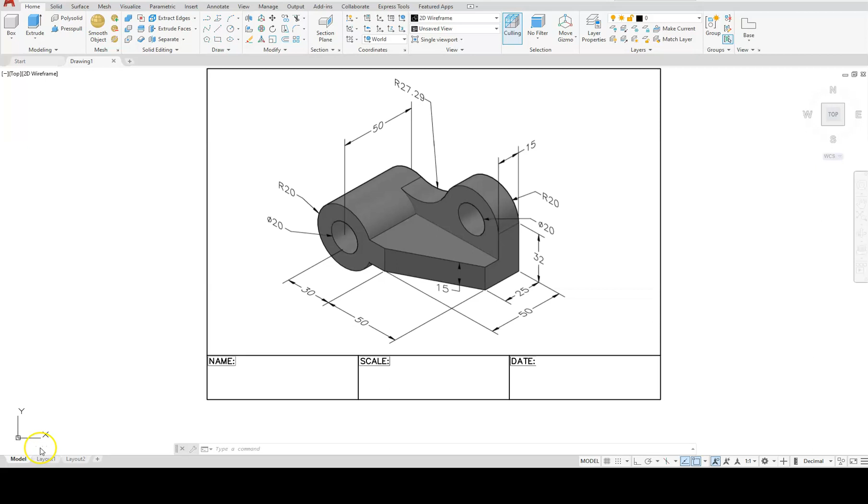Okay, in this example, we're going to see another extrusion, but this one has kind of two extrusions that I'm going to combine into one. So the first thing I'm going to do is make sure I have the correct O-snaps turned on.

Once again, you can pause the video, and these are the most common ones I'm going to have turned on. Also, you should see my ribbon is different because in the last video I came from a 2D drawing to the 3D. You still have the same 2D commands listed here under the Draw and Modify section, but I'm going to key them in just to make things a little bit easier.

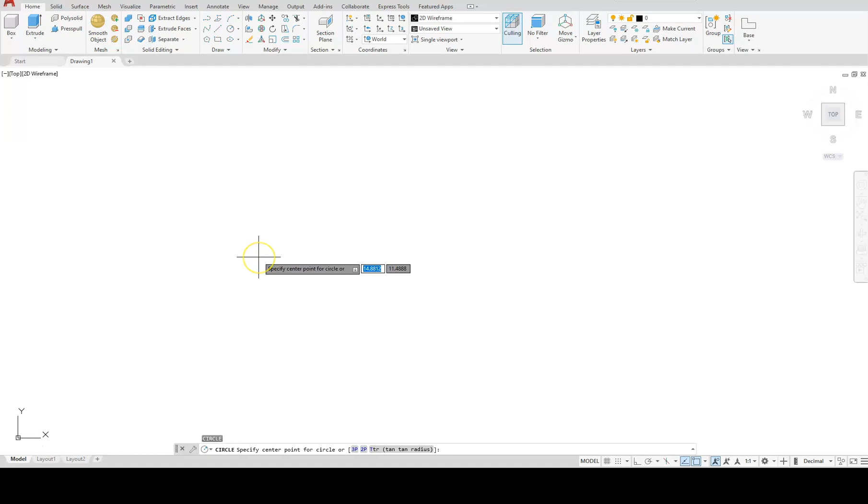Okay, so starting with a circle that has a radius of 20, remember the shortcut is C, enter. Select your location and where you want your circle to be, so I'm just going to click here. And then type in 20 for your radius, so 20 followed by the enter button.

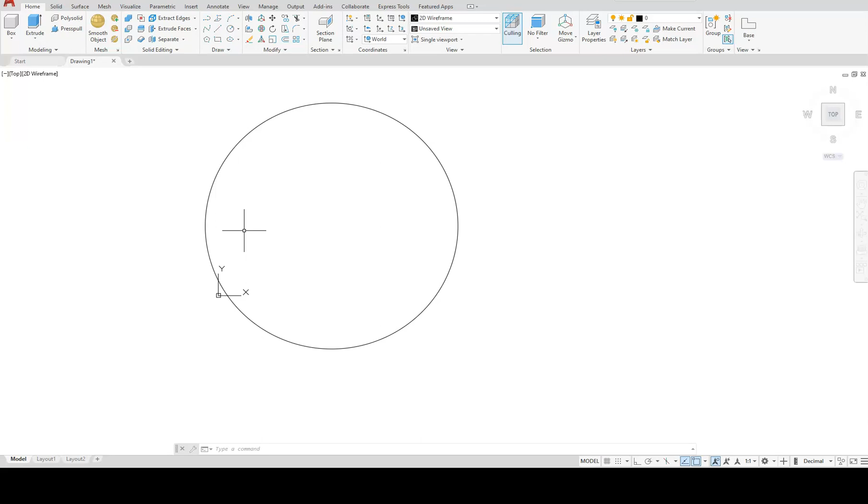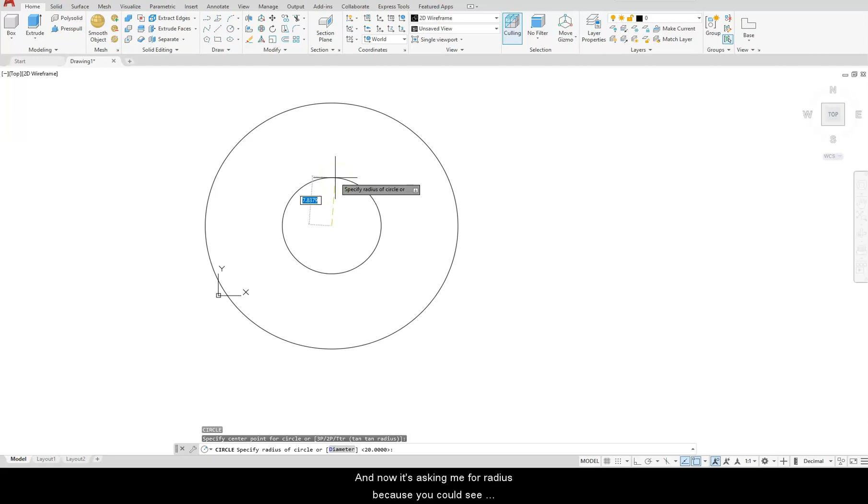Okay, now I have a diameter that I want to put on the inside of that, and the diameter is 20. So I'm going to type C, enter. I'm going to place the center of my circle in the center of my previous circle, so I'm just going to touch the edge and come down to where that plus is, left click, and now it's asking me for a radius because you can see that right by my cursor. I'm just going to go down to the command line and select diameter, and I'll type in 20.

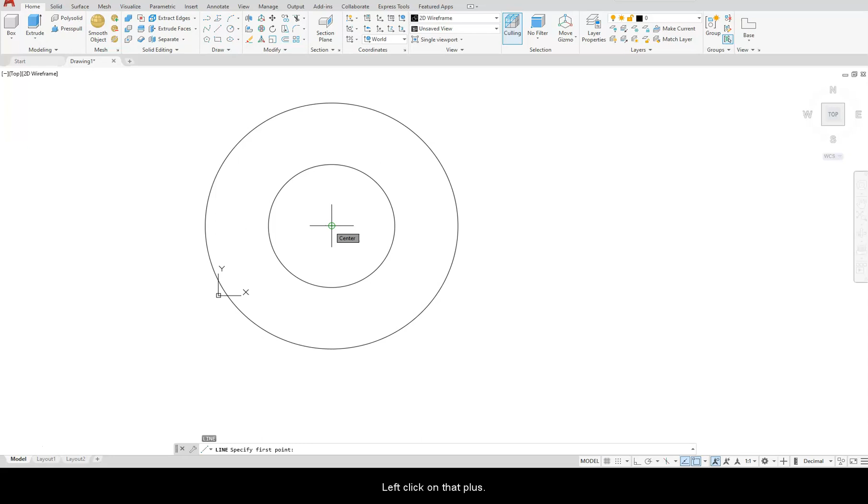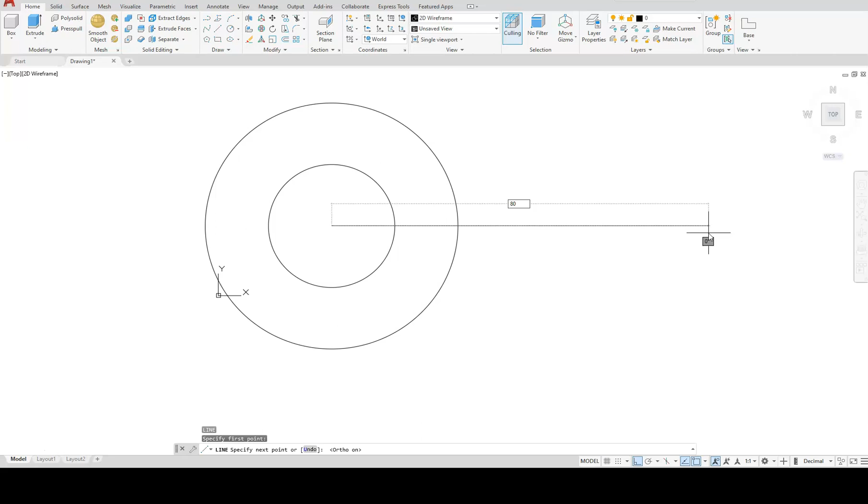Okay, the next thing I'm going to do is draw a line. So L, enter. I'm going to go to the center of here, and remember, if that center is not showing up, touch the edge of one of your circles, left click on that plus. You want to make sure you got a line going straight out this direction, so I'm going to hit the function key 8, F8, to turn my ortho on. Remember that the icon down here should turn blue. I'm going to aim it here to the right, and I'm going to type in 80, enter. I'll hit the escape button after I do that.

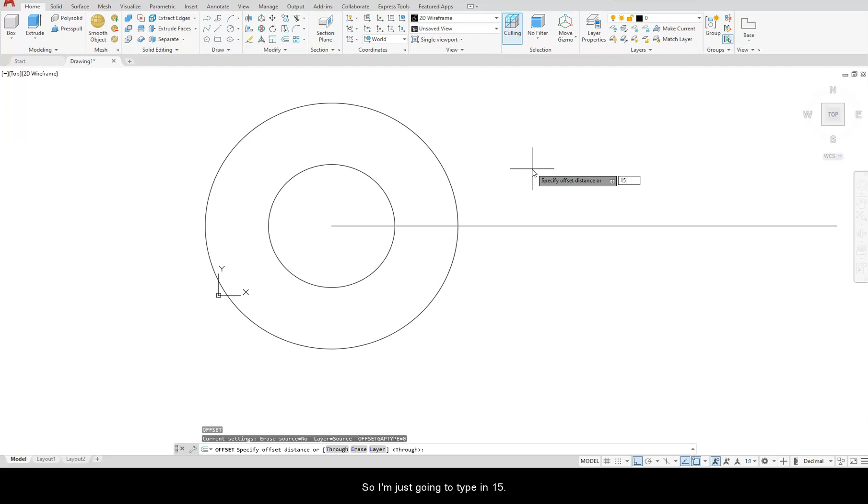Next, I'm going to use the offset command, and remember the shortcut for offset is O, enter. I need to give it a distance because that's always the first thing offset asks for. You can see by the drawing that the thickness of this is going to be 15, but I need to cut that number in half. So I'm just going to type in 15 divided by 2, enter.

Now I'm going to select the object I want to offset, so I'm going to select this line, and then I'll click above it - one left click here. I'm going to come back down and click that exact same line, and then I'll click below it, followed by the escape button.

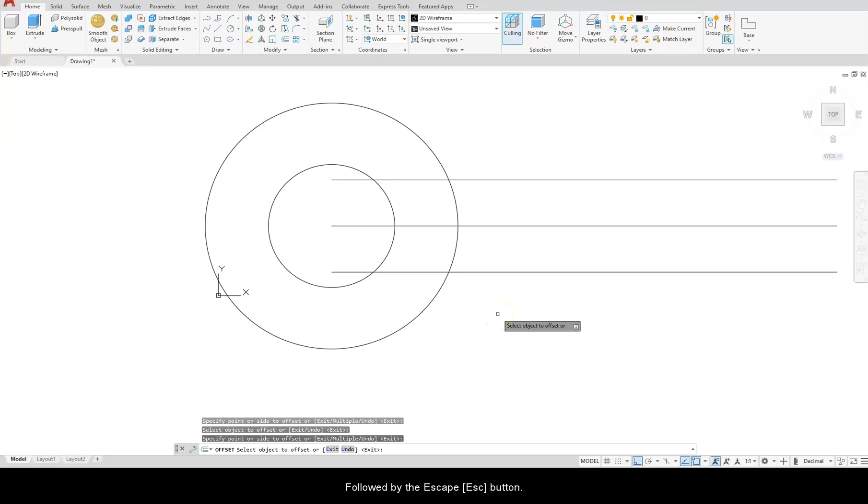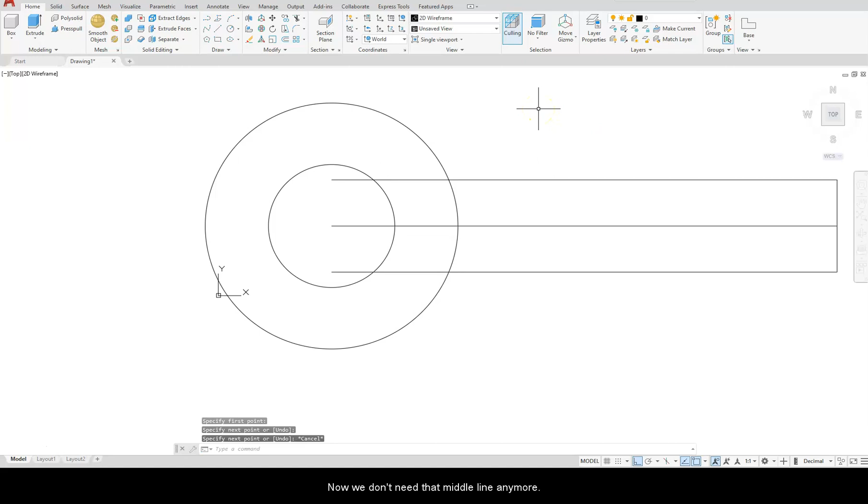Now I'm just going to create a line and connect those endpoints. So L, enter. Select this endpoint, and then go up and select this endpoint. Hit the escape button. Okay, now we don't need that middle line anymore, so I'm just going to go ahead and erase it - select it and hit the delete button on your keyboard.

Next thing I'm going to do is trim these lines that are extending into here. So the shortcut for trim is TR, enter. This is something new - if you're using the 2021 version, it bypasses the cutting edges for you, so I can just immediately start trimming by clicking here, and here, here, and here, and then I'll trim in between here. Now, if you have any version before this one, you're going to have to hit the enter button right after you type in TR, enter, and then followed by another enter. That'll get you to trim just like I did.

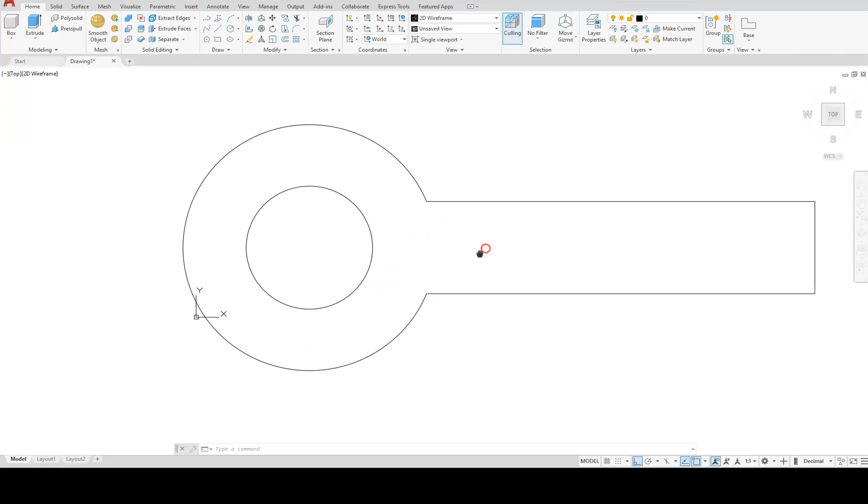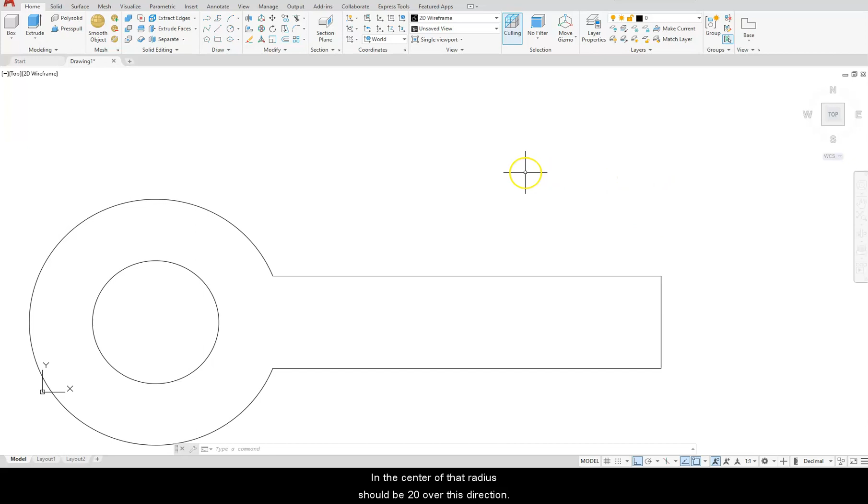Okay, so I'm just going to move this down a little bit. Next, I'm going to go ahead and create my shape that is located here. But first, I need to locate that circle that has a radius of 20. You can see that it's located from this line going up a distance of 32, and the center of that radius should be 20 over this direction. So I'm going to create a circle - C, enter.

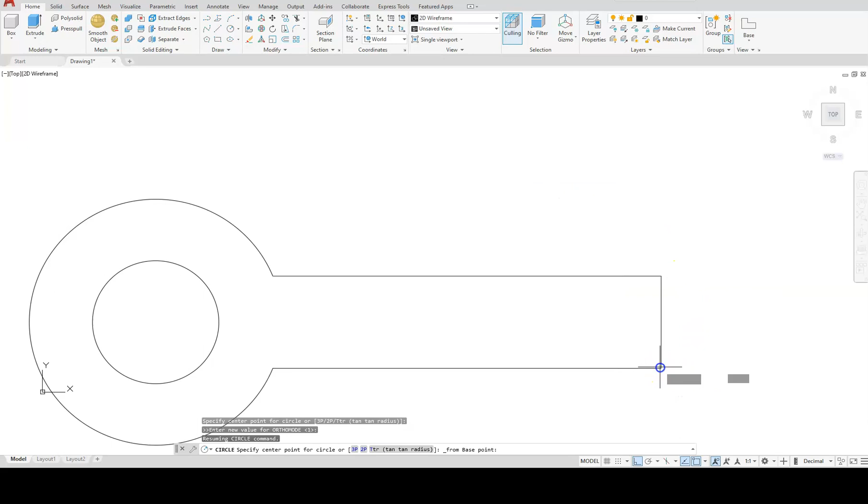Hold down the shift button and do a right click. I want you to select from, click on this endpoint. You're going to have to type in the @ symbol, -20, comma, 32. Enter. And now you're going to see the location of that circle should be in the right point.

I just need to give it the radius. So I'm going to type in 20, enter.

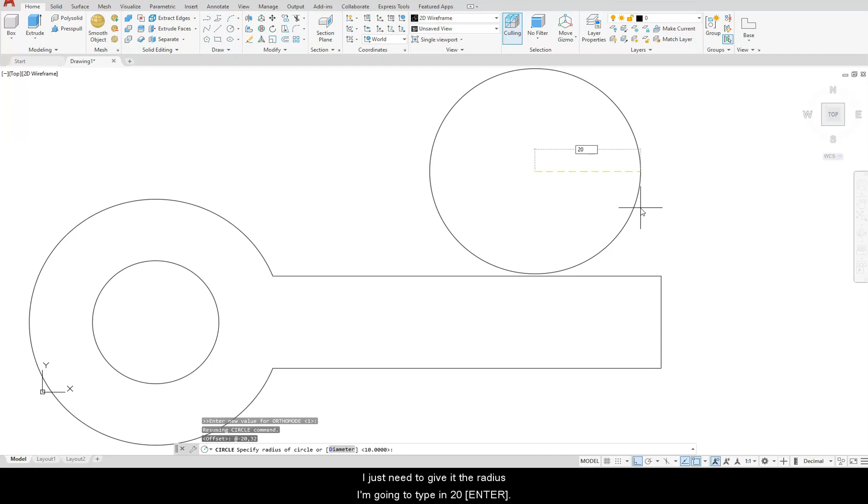I'm going to create a circle that has a diameter of 20 right on the inside of this one. So C, enter. Touch the edge of my circle. Come back and click on this center.

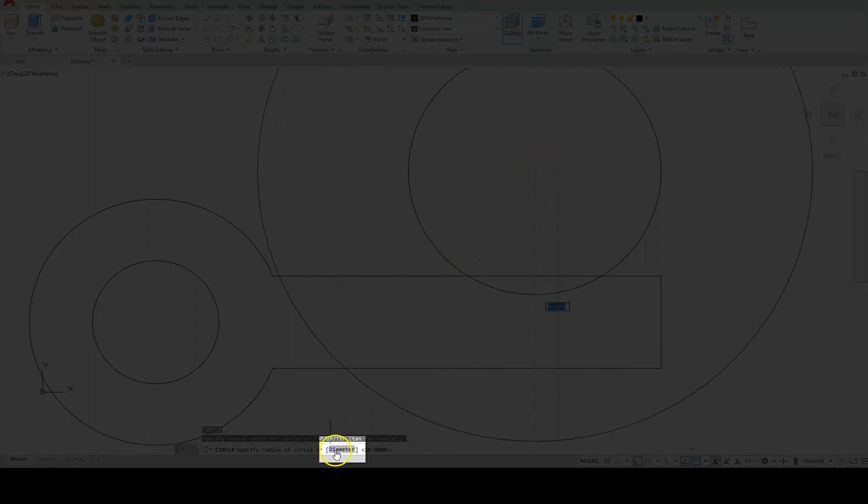Go down on your command line. Select diameter. Type in 20, followed by the enter button.

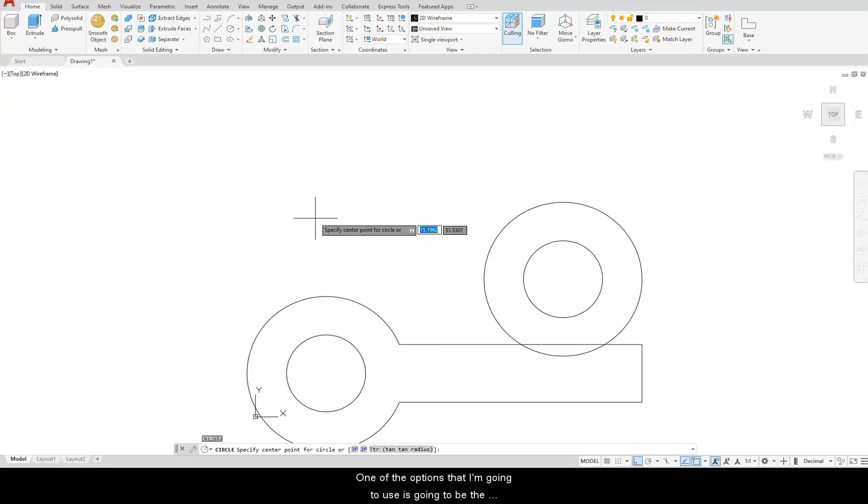Okay, now I need to go ahead and put the circle that has a radius here. So I'm going to go C, enter. And one of the options that I'm going to use is going to be the tangent radius option. So down on my command line, I'm going to select the one that says TTR tan tan radius.

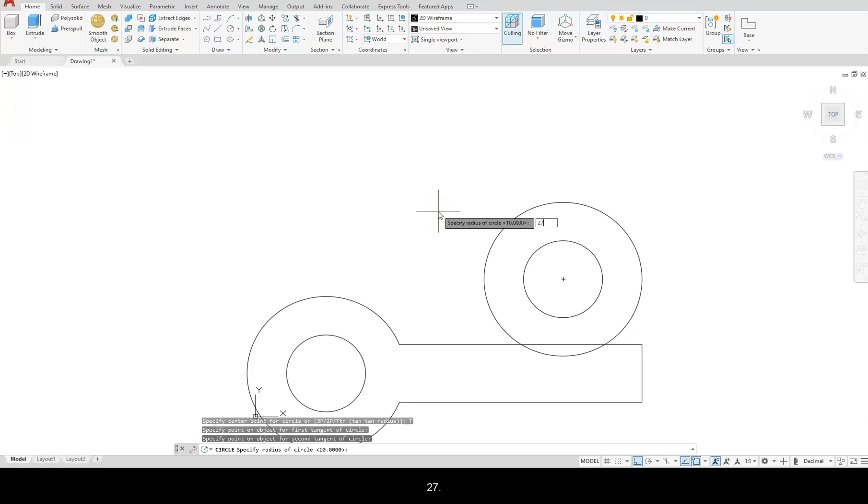I'm going to select on this circle, so click here. And then I'm going to select on this circle, so click here. And then I need to give it the radius, which is 27.29. Enter.

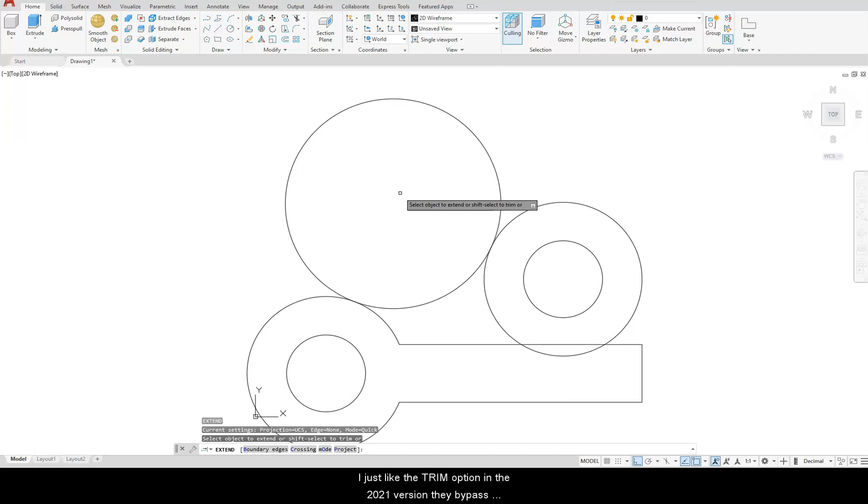I'm going to use the extend button this time, or the extend command. So EX, enter. Just like the trim option in the 2021 version, they bypassed the boundary edge. So I'm just going to select this line here. Make sure that you click along the top edge of this line to get it to extend up to that circle.

Followed by the escape button. I'll go back and trim. So TR, enter.

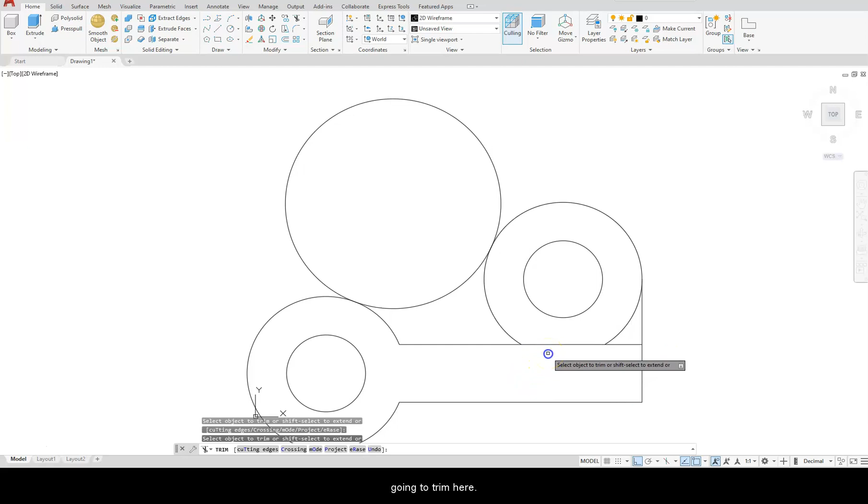Now I'm going to start trimming off these circles. So I'm going to trim here. And then here. Followed by here. And then on my circle on this big one on the outside, I'm just going to select here. Followed by the escape button.

Now I have everything that I need to complete my 3D shape, except I need to create them with polylines. Remember that one of the rules of creating solids is that these lines have to be polylines. I'm going to turn these into one rather quickly with the boundary command. The shortcut for boundary is BO, enter.

It's going to ask you to pick points, so I'm going to select this icon here. And then I'm just going to pick right on the inside of here. I'll hit the enter button. And you can see on my command line it says 2 polylines were created. It actually created a polyline on my outside and it created another one around my circle.

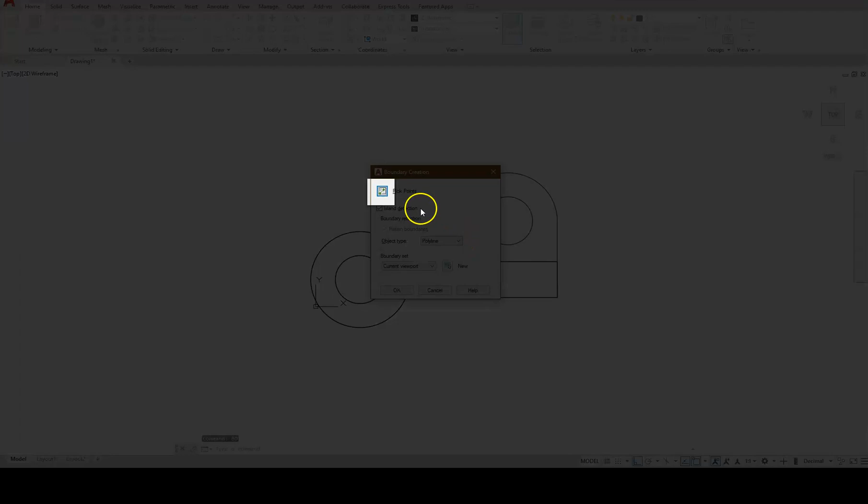I'm going to do that command again for the inside of this one. So BO, enter. Pick points. Select right in the inside of this one. Hit the enter button. And now you should have that same thing on the bottom on your command line that said it created 2 polylines.

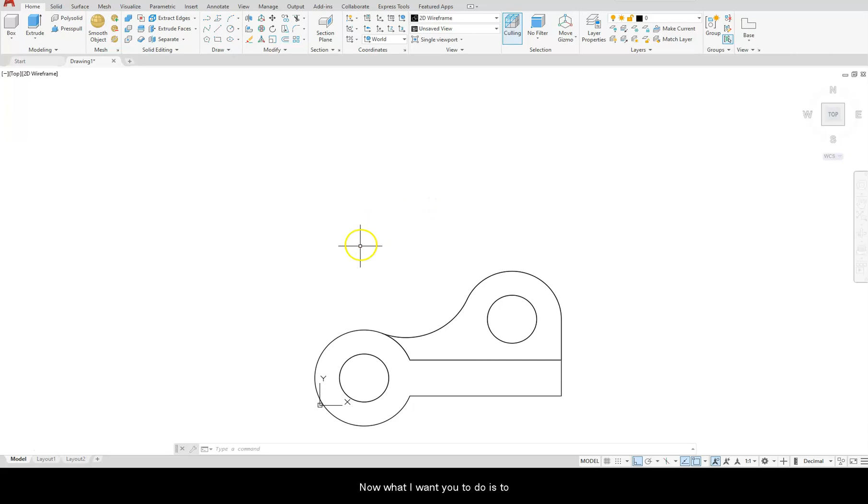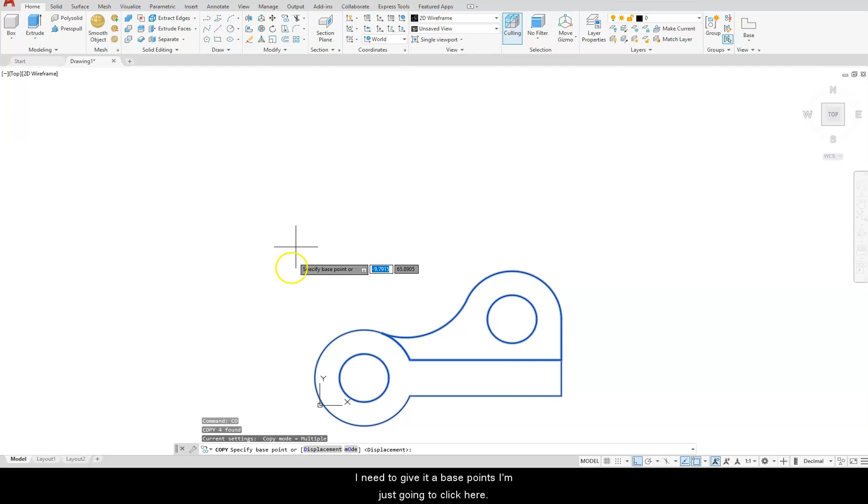Just going to pan down a little bit. Now what I want you to do is select this object here, this object, this circle, and this circle. And I want to copy these up. So with them selected, I'm just going to type CO, and that's the shortcut for copy, enter. Now I need to give it a base point, so I'm just going to click here and come up and click, followed by the escape button.

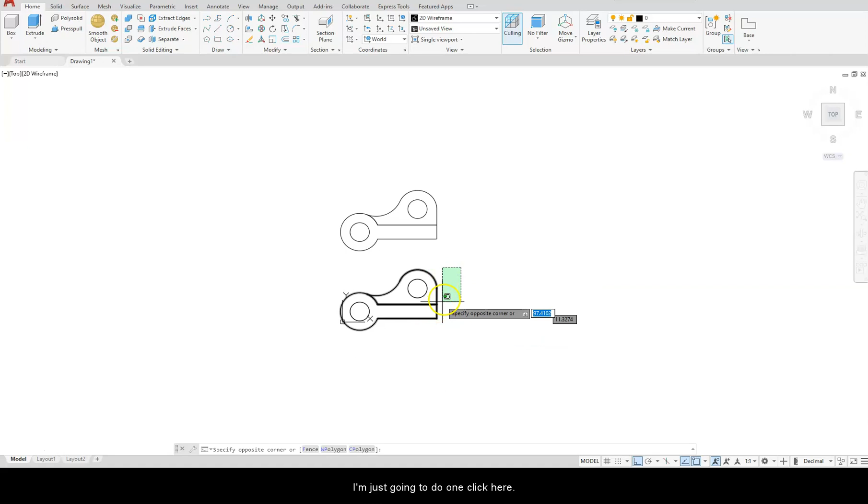Next thing I'm going to do is zoom out a little bit. And these shapes here at the bottom, I'm going to go ahead and erase. So I'm just going to do one click here and go across, and one click here and hit the delete button.

Okay, I'm going to put this in a 3D isometric view. So I'm going to select this lower left corner of my view cube.

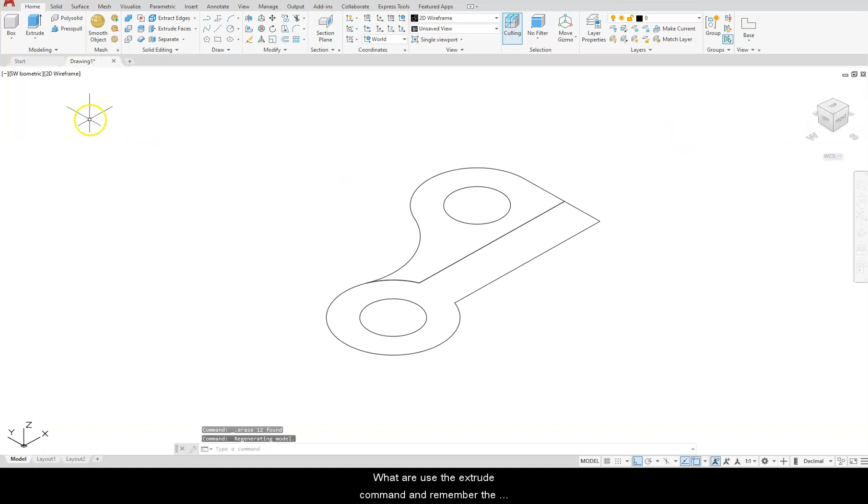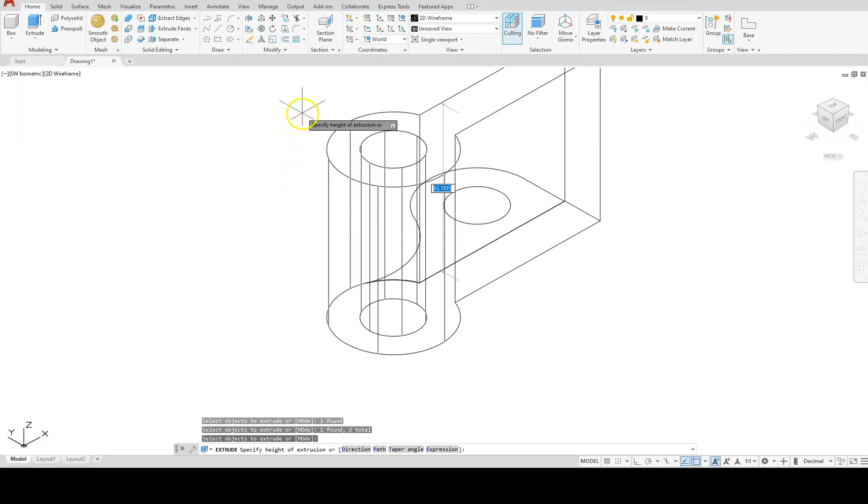I'm going to use the extrude command, and remember the shortcut for it is EXT, followed by the enter, or you can select this icon. And I'm going to select this object here and this circle, hit the enter button. I'm going to come up in the upward direction and I'm going to type in 50, enter.

I'll go back to the extrude command, and I'm going to select this object here and here, followed by the enter button. I'm going to aim in the up direction, and I'm going to type in 15, enter.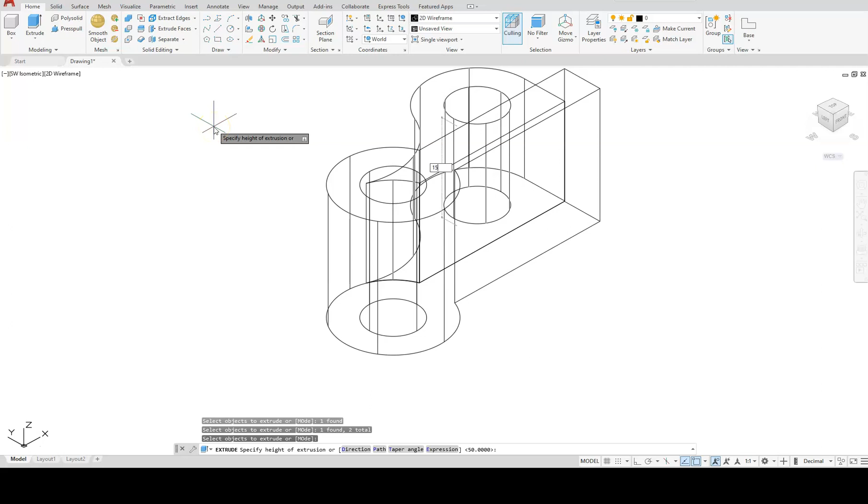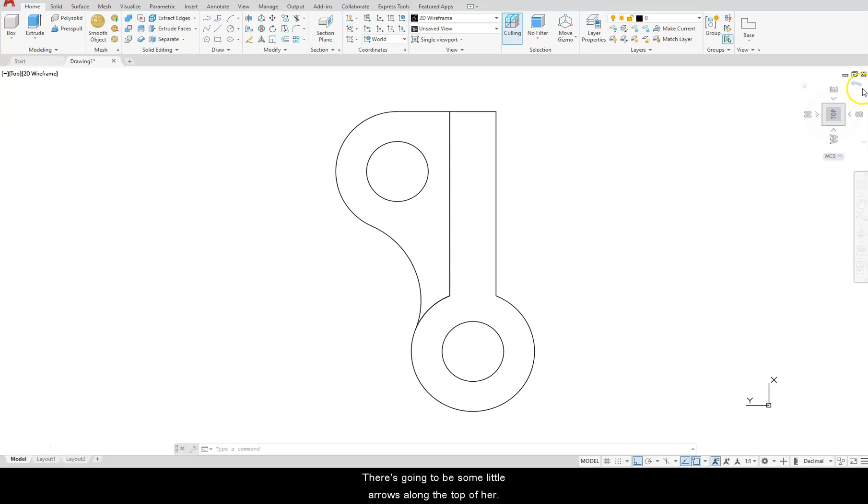Next, I'm going to click on this view cube where it says top. And you can see that if yours rotated correctly, but if yours is rotated on this kind of angle, if you come over to your view cube, there's going to be some little arrows along the top up here. So I'm just going to select this arrow here just to rotate my view to where it looks like that.

Underneath where it says 2D wireframe here, underneath my visual style options or controls, I want you to select here, and then select the one that says shades of gray. Now what I'm going to do, oh, I'm sorry, I meant to select shades of gray. Come down one more, shades of gray.

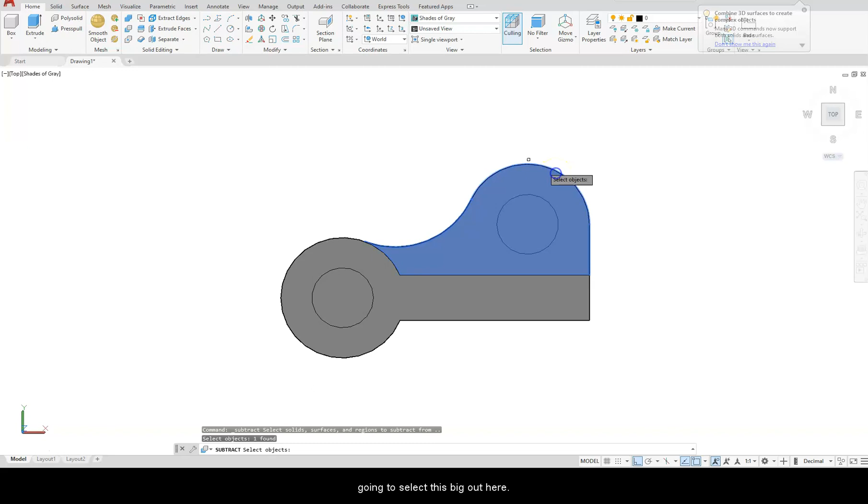The next thing I need to do is go ahead and subtract out these circles out of my objects. So I will use the subtract command. So I'll select it here. And with the subtract command, you want to select the object you want to keep first. So I'm going to select this big object here, followed by enter. And then I need to enclose this object here in the middle. So you can see that it is highlighted.

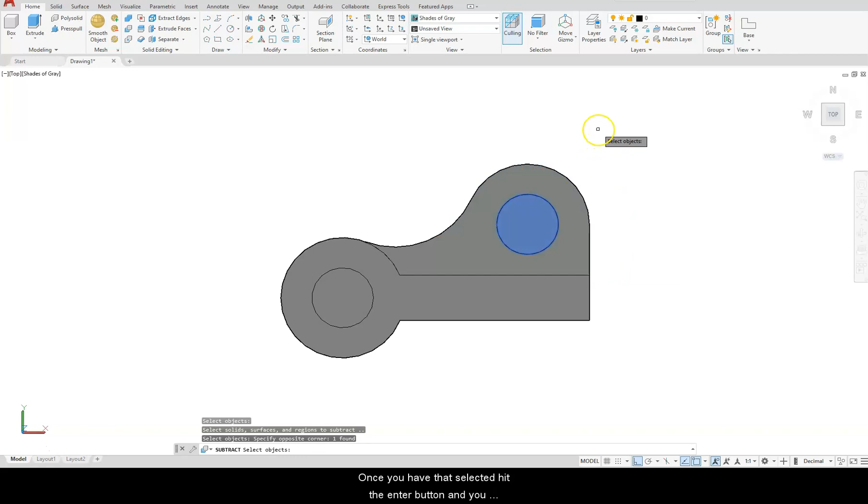If you are having trouble selecting that, another option that you can do is one simple click to the outside here and one left click here. Once you have that selected, hit the enter button and you will indeed see that that will subtract from your solid.

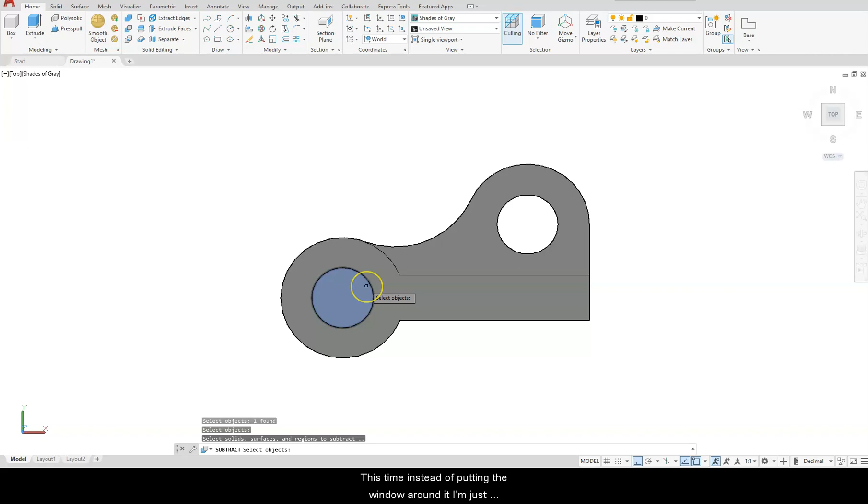I'm going to do that again. Go to the subtract. Select the object I want to keep, followed by enter. And this time, instead of putting a window around it, I'm just going to select it here. So once you have that selected, hit the enter button.

Next, I want to take a look and see how this object looks along this side. So I'm going to select this lower right of my view cube. And you can see that these are two separate solids.

The next command I'm going to use is going to be the union command. So I'm going to select this icon here. And it really doesn't matter which order you select these in. I can select this object and this one, followed by the enter button. You will see that that line will go away. And now when you select this object, it's all one object.

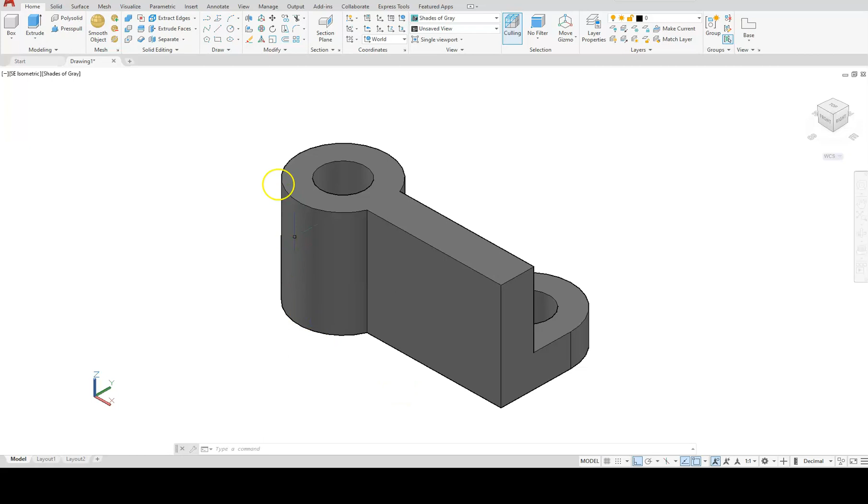Next, I want to go ahead and put a chamfer along this edge. So I'm going to click where it says solid. So click on the solid tab. And then where it says fillet edge, I want you to select the drop down here and select chamfer edge.

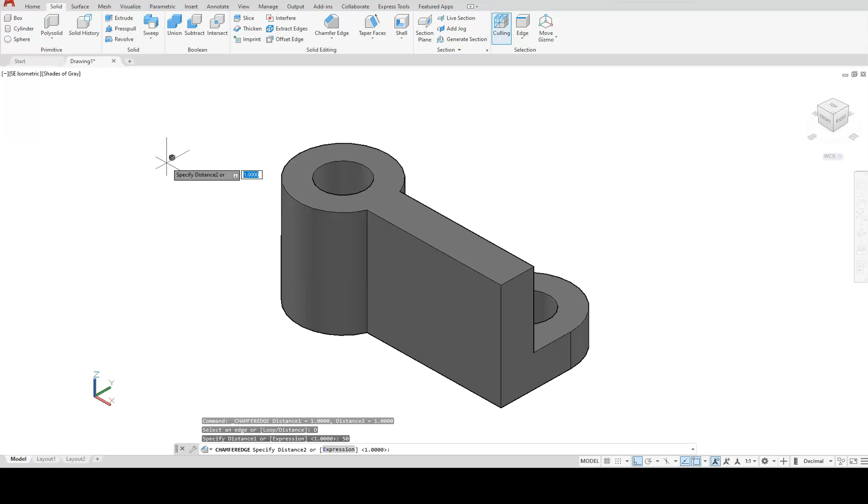Underneath where it says distance on your command line, select that. I want you to type in the number 50, enter. And for my other number, I'm going to type in 25, enter. Now I'm going to select the edge that I want to chamfer, so I'm going to select here. And you can see that my shape came out the wrong direction.

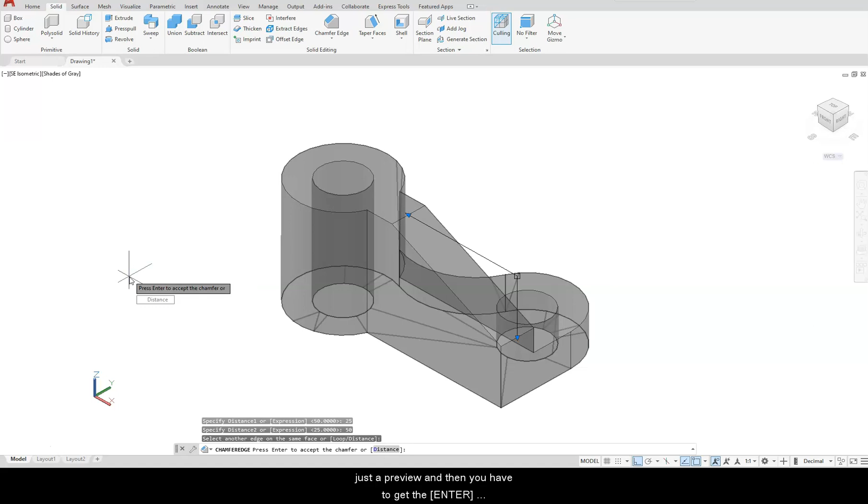So I'm going to go back to the word distance, and I'm going to reverse the order in which I had those in. I'm going to type in 25 here, enter. And then I'm going to type in 50, enter. Once I have that correct, and it's looking like the way I want it, I'm just going to hit the enter button, and this is just a preview, and then you have to hit the enter button again to accept it.

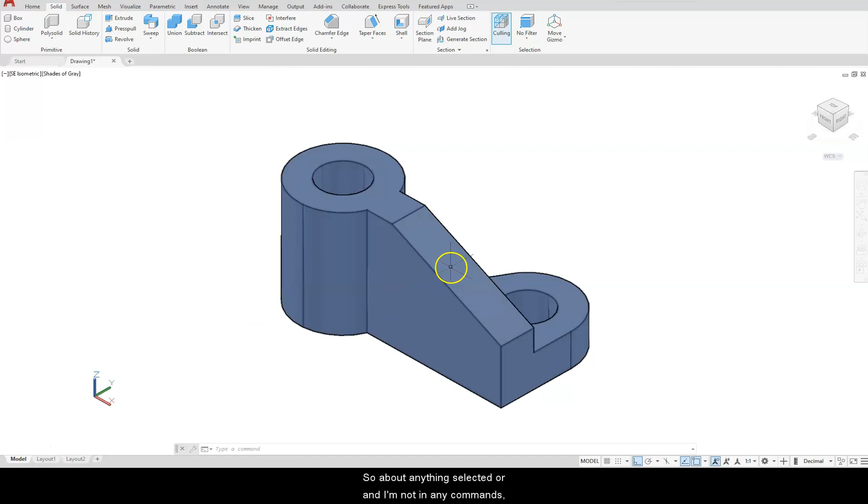Alright, so one of the next things I want to do, I want to get this oriented the right direction. You can see on my view cube that the front view is facing here, where if I leave it the way it is, it's kind of looking at it sideways. So without anything selected, and I'm not in any command, I'm going to select my view cube. Underneath my gizmos, I'm going to select the rotate gizmo option.

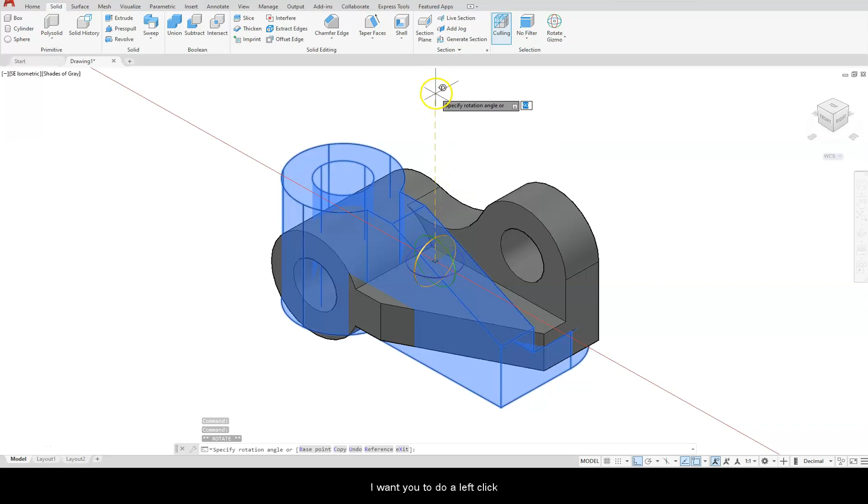I'm going to click on this red axis. And if I pull going straight up, I want you to do a left click and hit the escape button twice. Okay, so everything is rotated and looking the way I want it. So if I click on where it says front, you will see that this will rotate around to the correct front view.

Next thing I want to do is go ahead and put my title block in. So I'm going to switch to layout 1 by selecting here along the bottom where it says layout 1.

I'm going to delete this viewport. So select it and hit the delete button. Let's go ahead and insert our title block. So I enter. And since we already inserted our title block from example 1, it's going to be underneath our library here, underneath recent, or it's underneath the libraries.

I want you to select and do a right click on this one. Well, actually, before I do that, I want you to make sure you go at the bottom here and uncheck where it says insertion point. Now come back to this option, do a right click and choose insert. And it should come up with your standard stuff that you have to fill in your title block with. Go ahead and select OK.

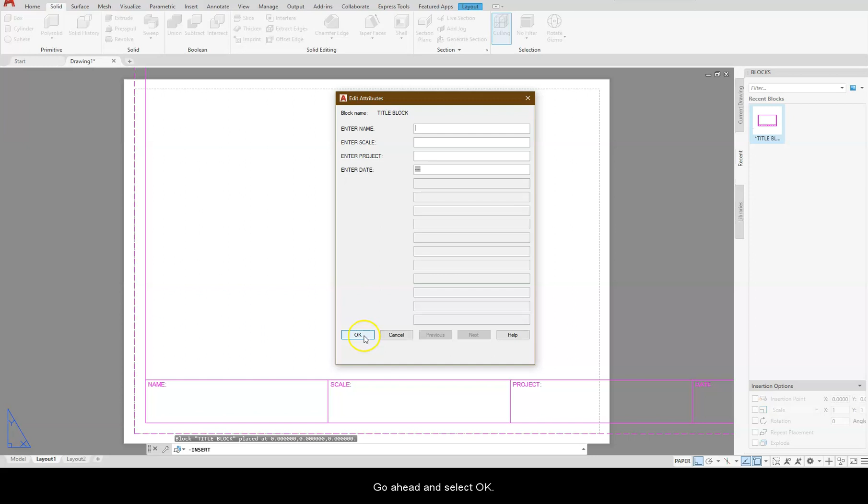I want you to select where it says layout at the top, so select the layout tab. Go over to where it says page setup. And just like how we did in example 1, we're going to do the exact same thing. So I'm going to select modify. Underneath where it says printer, select the drop down, DWG to PDF. Where it says page size, click the drop down, ANSI full bleed B 17 by 11 inches.

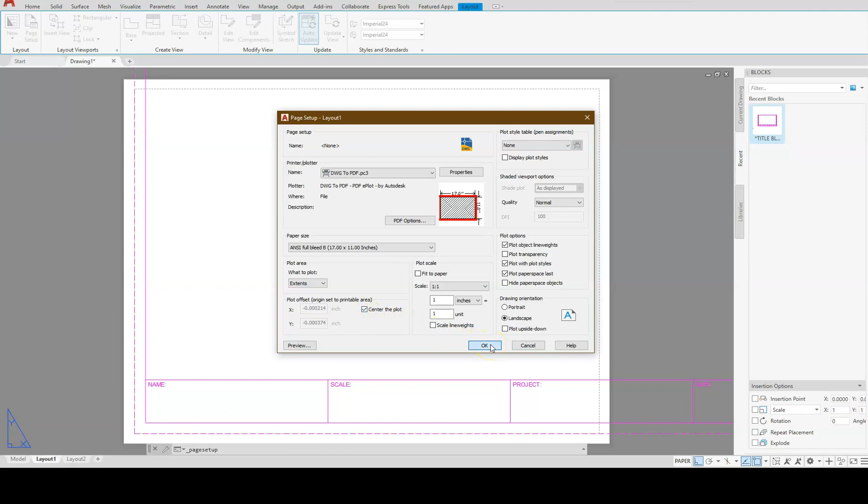Underneath where it says plot area, choose extents, and then put a check in the center of the plot box. Select OK, and close. Next, I need to bring in my model. So I'm going to click on where it says base. From model space, select that.

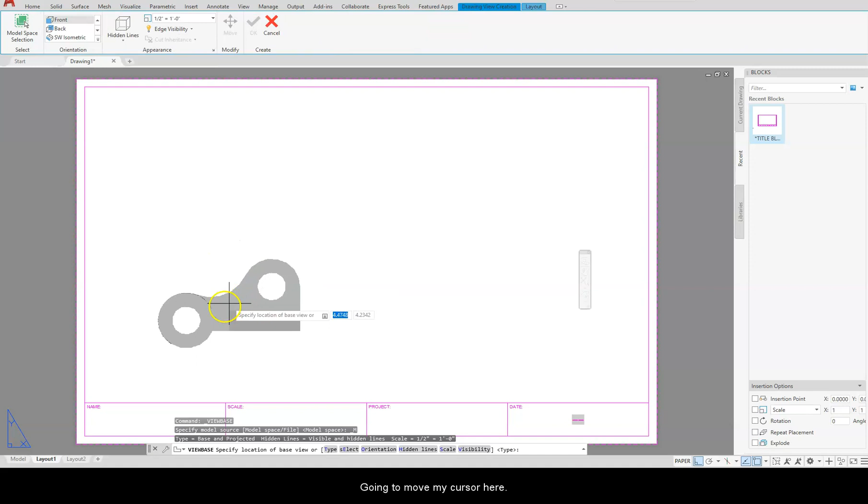Just going to move my cursor here. And this is going to be my front view, so I'm just going to simply left click here. Hit the enter button. Then I'm going to move my cursor here. And then click here, and then one click here, followed by the enter button.

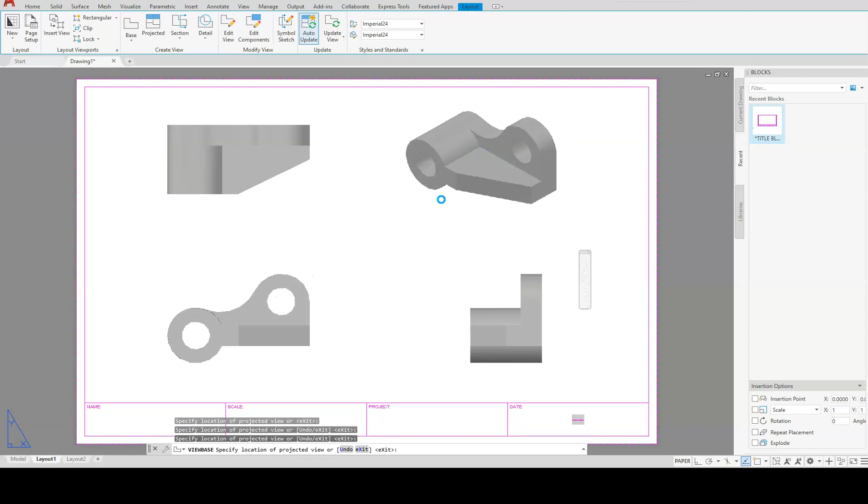Next, I'm going to change this isometric view to get rid of the hidden line, so I'm just going to double click whenever this rectangle appears. So when I have this view selected, double click. Underneath where it says hidden line, select the drop down and go to visible lines, followed by the escape button.

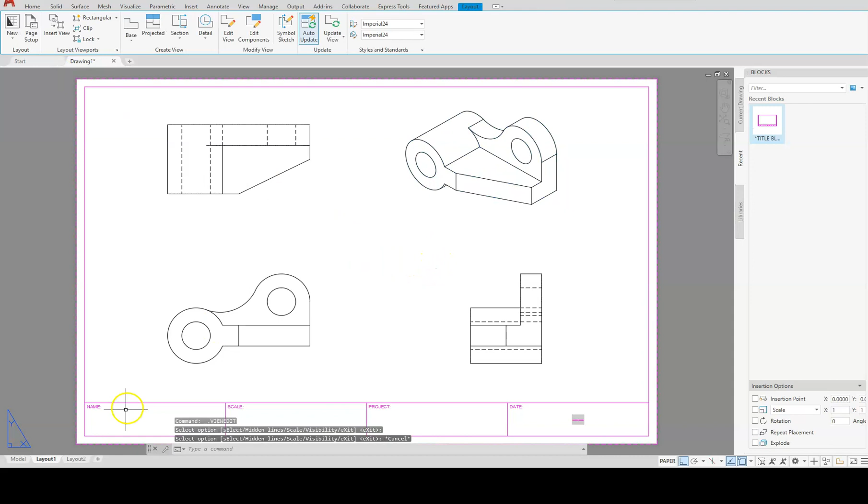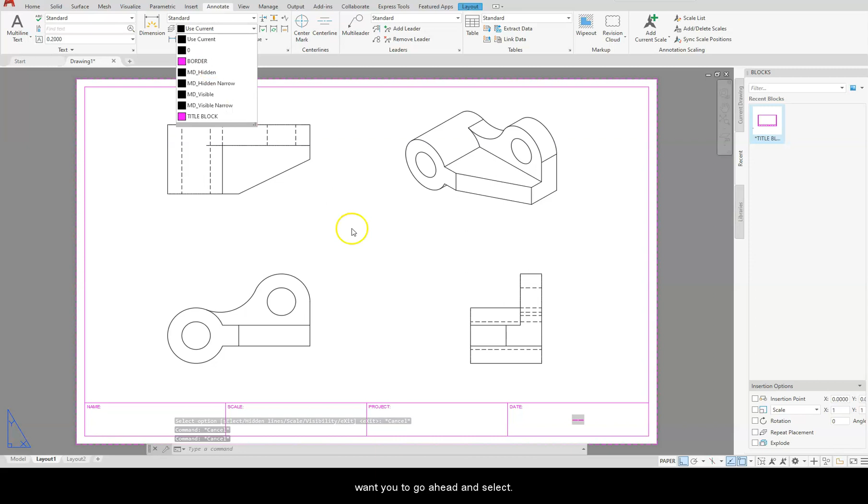Now we're ready to put dimensions on this. So I'm going to click on where it says annotate. Underneath this drop down where it says use current. And now I don't have my dimension layer here. And yours may be there. If you have dimension layer there, I want you to go ahead and select it. If you don't, I want you to type in DC, that stands for Design Center. Hit the enter button.

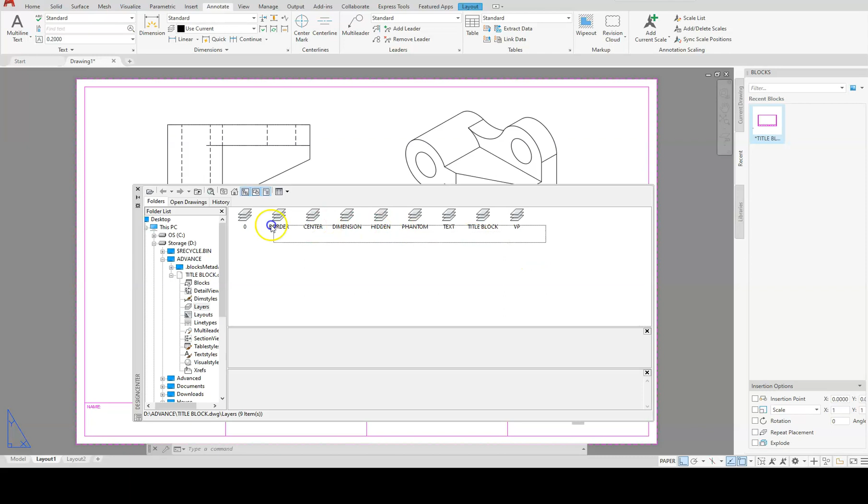Then your Design Center will appear. Underneath here, you can see that I have all of my layers that's going to show up. You can simply navigate to that. Just go to wherever you keep your title block. I'm going to select all of these. Then I'm going to right click on one of the blue areas and select the words Add Layers. I'll close my Design Center. And now underneath this drop down, I should get the word Dimensions.

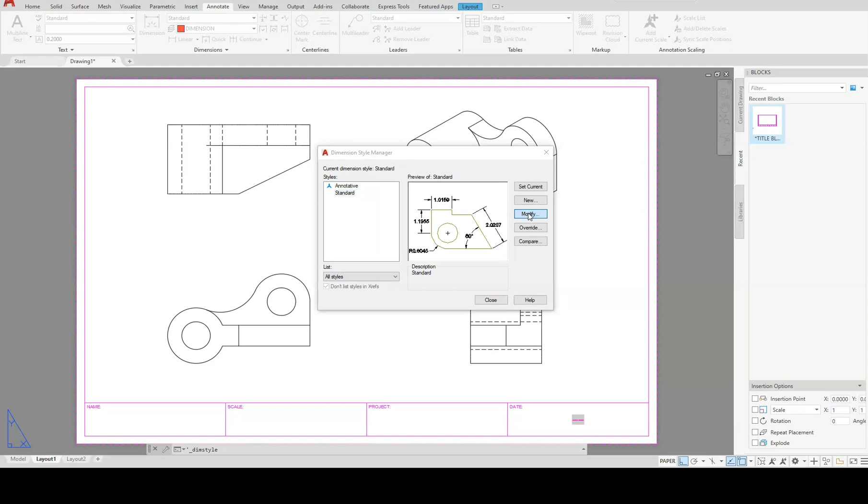Okay, so I'm going to go ahead and put dimensions on this. And I'll start with my radius dimensions first. But before I do that, let's go ahead and set up our dimension style. You can select this little down arrow here or type in D, Enter. Go to this dialog box, go to Modify. I'm just going to go to where it says Primary Units, select precision, and go all the way up to where it says 0. OK. And close.

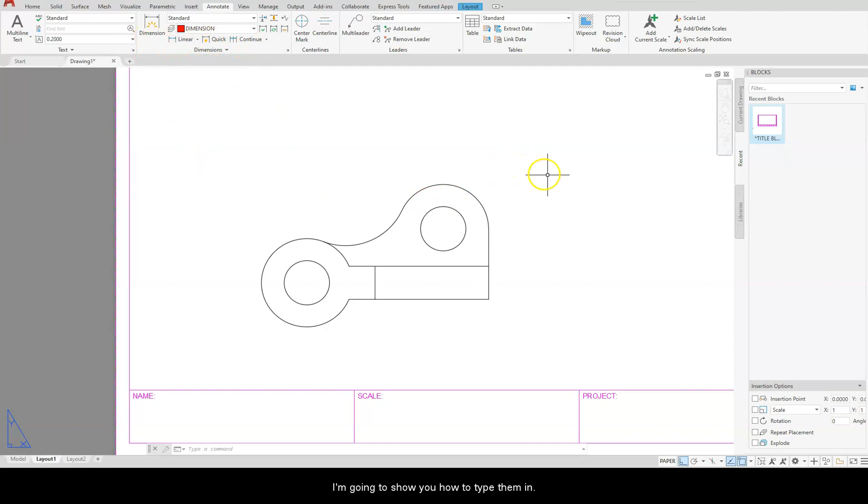So I'm just going to zoom in just to this one little view here. So I'm going to look at my front view. Now I'll go ahead and start putting some dimensions on. So instead of going up here and selecting these, I'm going to show you how to type them in. I want to make a linear dimension, so D, L, I, enter. I'm going to select this center here. And then I'm going to select that endpoint here, bring it down, left click.

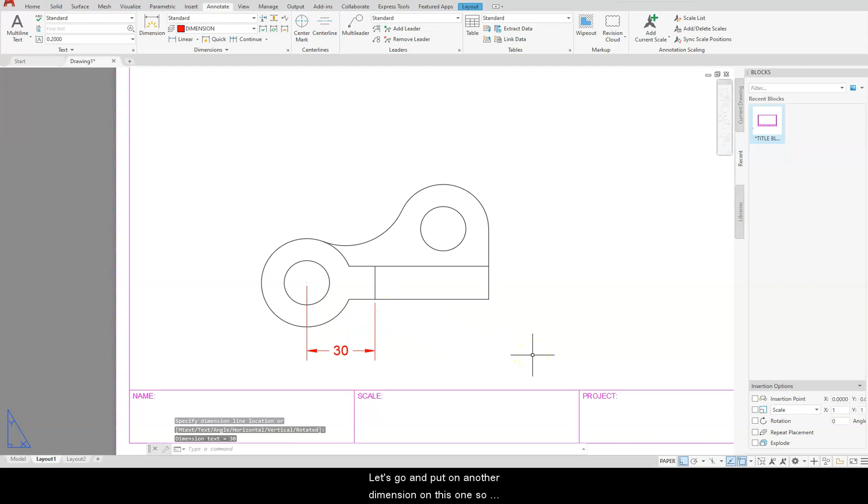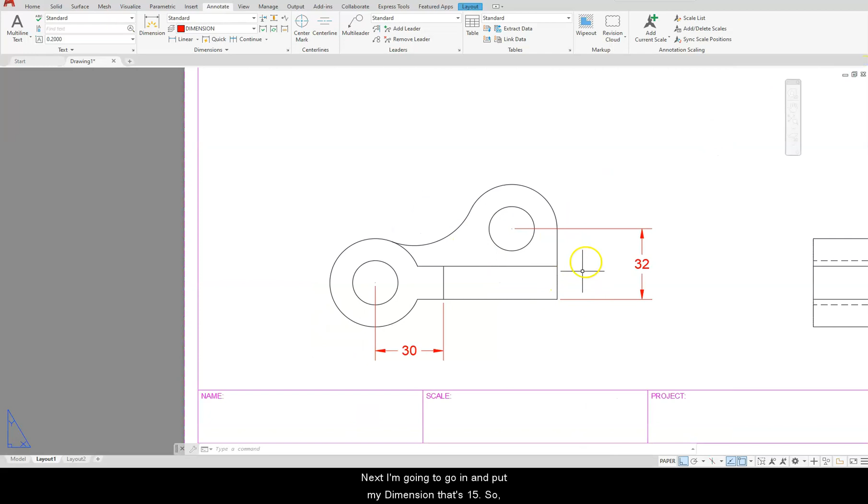Let's go ahead and put another dimension on this one. So another linear, D, L, I, enter. I'm going to select this endpoint here to that center, drag it out here to the right, and a left click. Now I'm kind of getting a little space here. I'm just going to go ahead and close my insert box here by selecting this little X here. Next, I'm going to go ahead and put my dimension, that's 15. So DLI, enter.

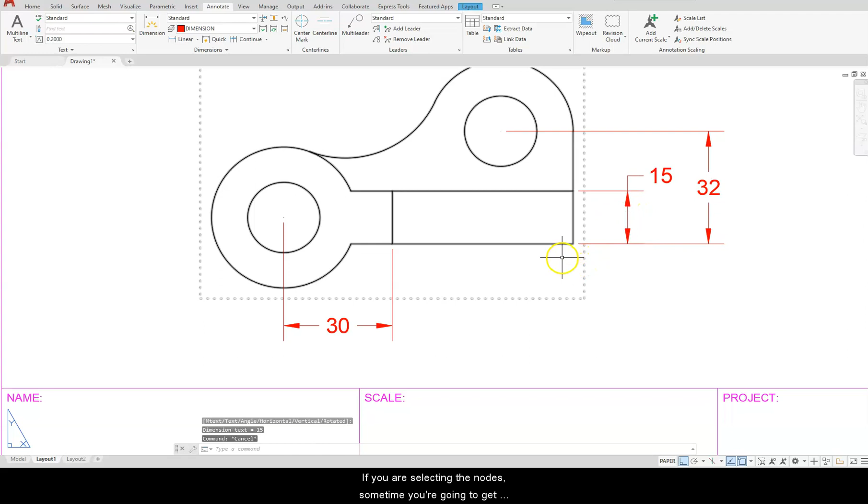And make sure that you are selecting those endpoints. And I'll click here. If you're selecting the nodes, sometimes you're going to get those little yellow boxes that's going to appear.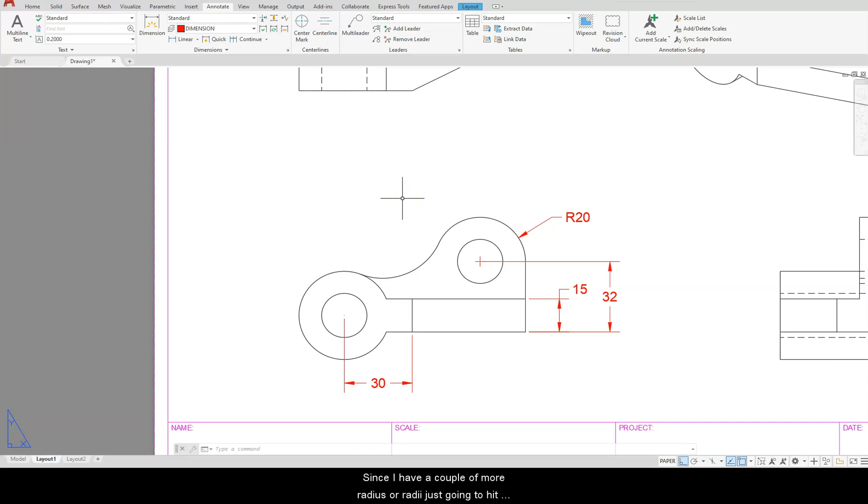Okay, next thing I need to do is go ahead and put my radius dimensions. So D, R, A, enter. And I'm going to select this big radius here on the outside. So once you select that radius, or that arc, go ahead and select the location for it and left click. Since I have a couple of more radius, or radii, I'm just going to hit the enter button. That'll take me back to the previous command.

Then I'm going to select that arc. Now if I go past the center of it, it kind of does some weird things, so I'm just going to keep it right underneath that center. I'm going to hit the enter button again on my keyboard, and then I'm going to select that arc.

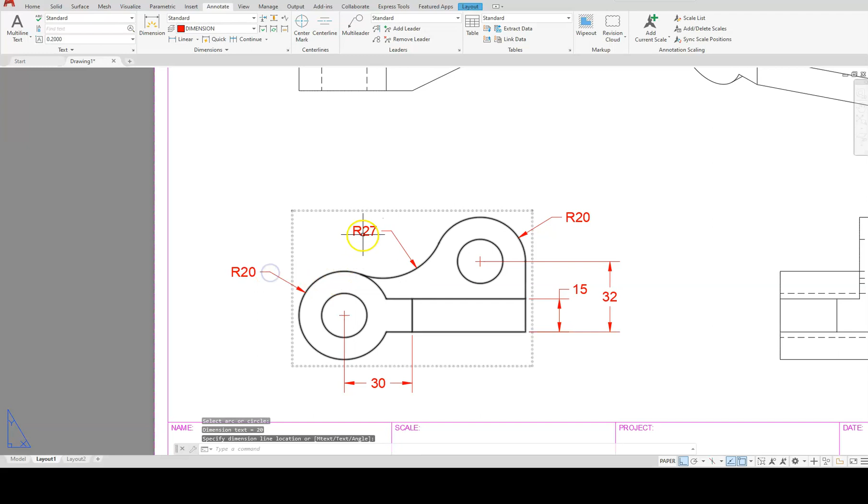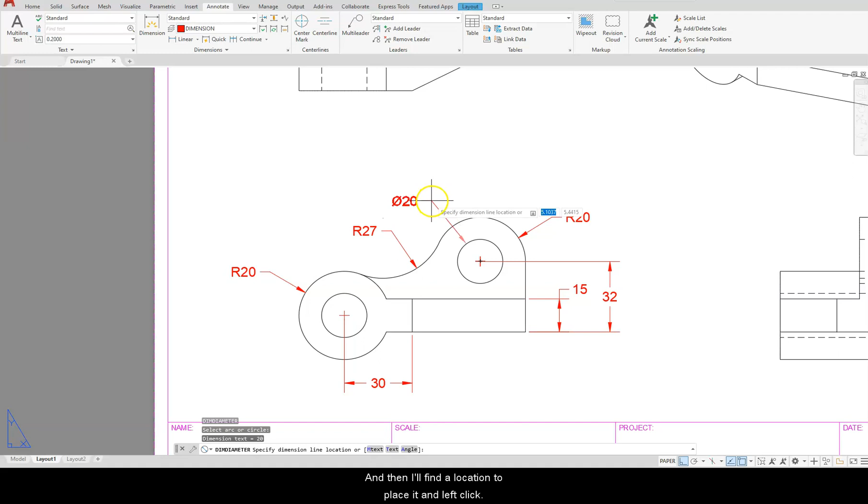Next, I want to go ahead and put some diameter dimensions on this, so I'm going to go DDI for diameter. Then I will select this circle here, and then I'll find the location to place it and left click. Hit the enter button or type in DDI again, select that circle, find a location to place it.

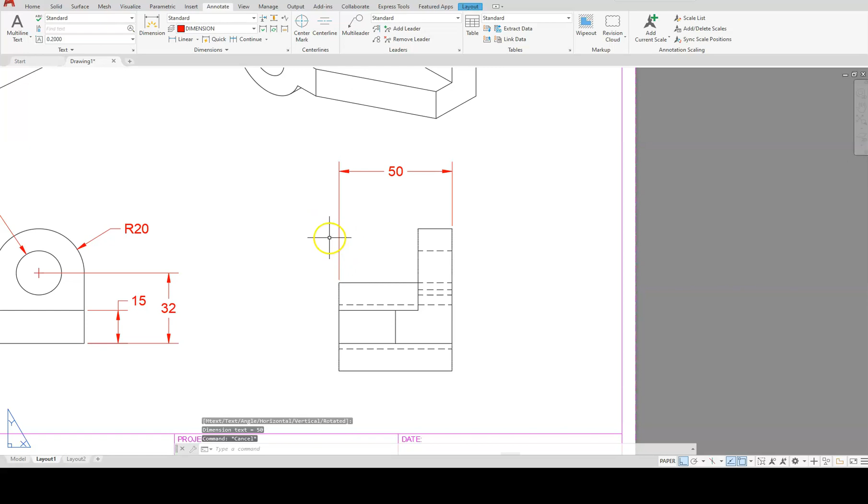Let's go ahead and do the dimensions over here. So DLI, enter. Select this endpoint, that endpoint, come above and place it. DLI, enter. Then I'm going to select this endpoint. And once again, make sure that you're getting the endpoint symbol to come up and left click along that. And I'll come and place the dimension.

Along here on this top view, I'm going to place another DLI, enter. I'm going to do this one a little bit differently. Since this line is a continuous line, after I type in DLI, enter, I will follow that with another enter. And now I'm just going to select this line and come straight down. Just going to hit the enter button, and I'll select this endpoint and that endpoint and place my dimension here.

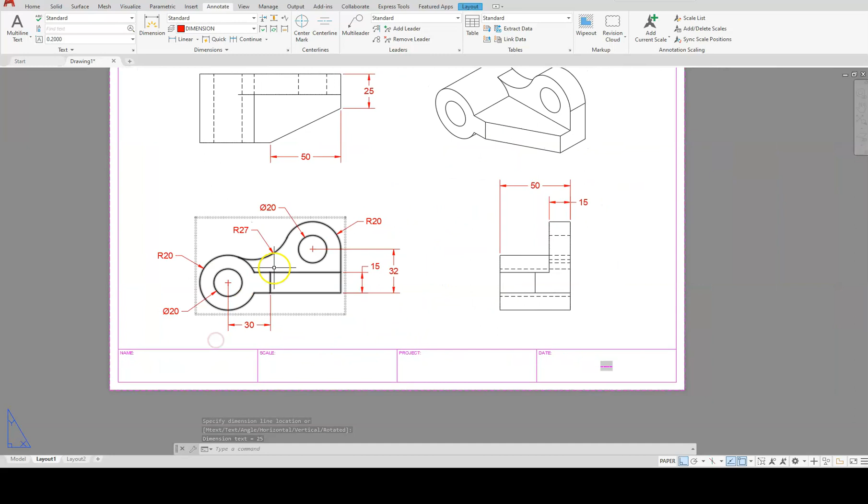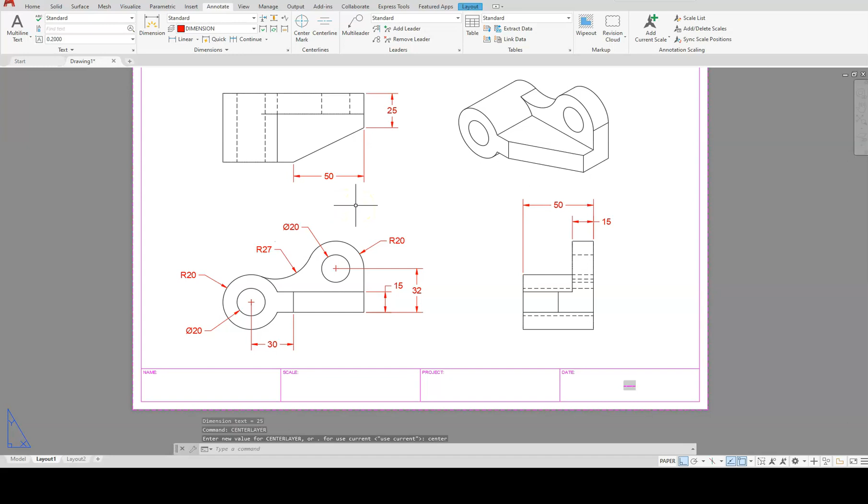The next thing I'm going to do is go ahead and put in my center lines. So before I do that, I'm going to type in center layer, one word. And then after you hit the enter button, it's going to ask you what layer you want to use. I'm going to type in the word center and hit the enter button. I will go ahead and put in all of my center marks now, so my center lines first.

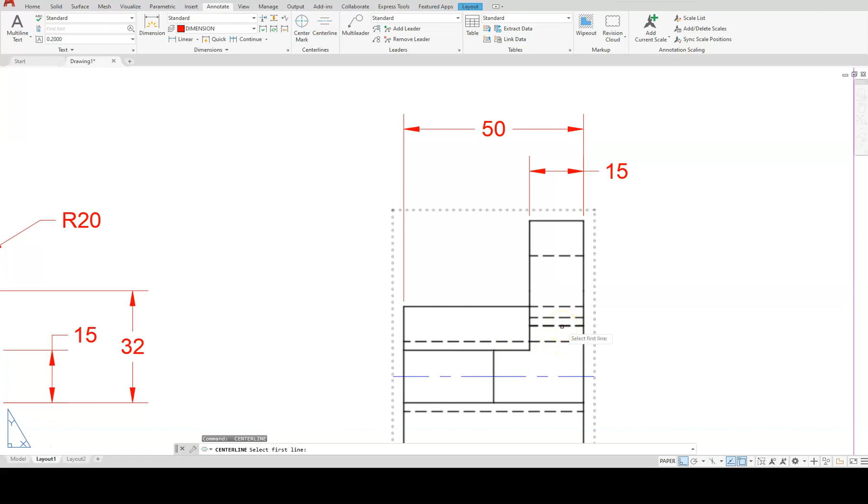So I'm going to select center line here. We'll select that line and that line. Just going to hit the enter button, select this line, the enter button again. I'm going to select this line, enter button, and then I'm going to select this bottom line here and that line there.

Now I'm ready to put in my center marks, so hit the escape button and then go to center marks. I'm going to select this big circle here and the big arc here, followed by the escape. Now I need to go ahead and fill in my title block, so ATE enter.

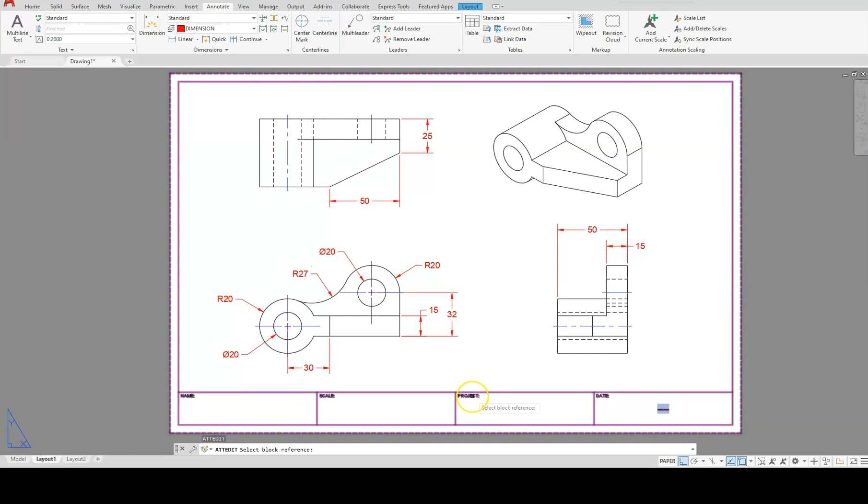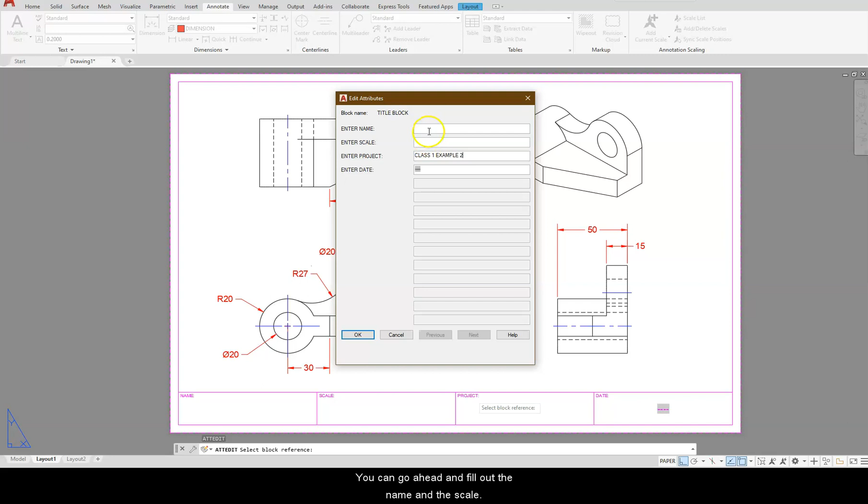Select the title block, and then underneath where it says projects, go ahead and type in class 1 example 2. And you can go ahead and fill out the name and the scale. Hit the OK button. Remember how to find the scale?

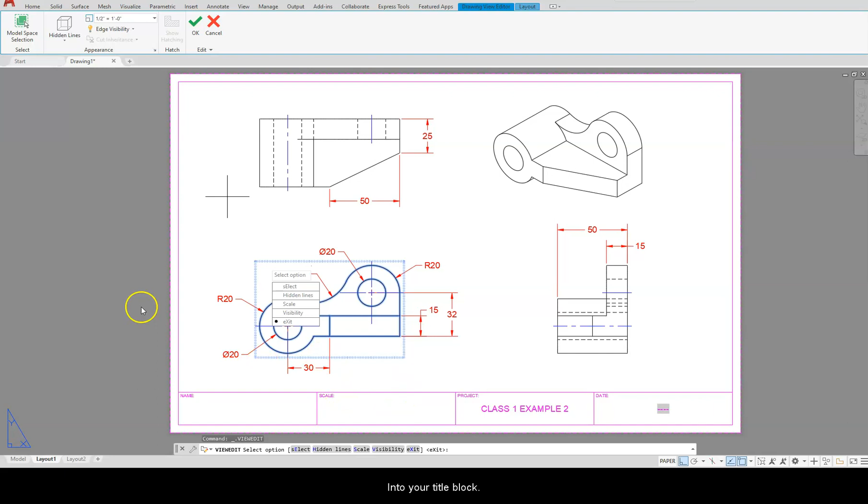If you double click on one of the views, it's going to tell you what the scale is listed right along the top here. Just go ahead and copy that text or type in that text exactly the way it is into your title block. Hit the escape button twice to get out of that. Okay, so once you fill in your name, your scale, go ahead and save this and make sure that you upload it.

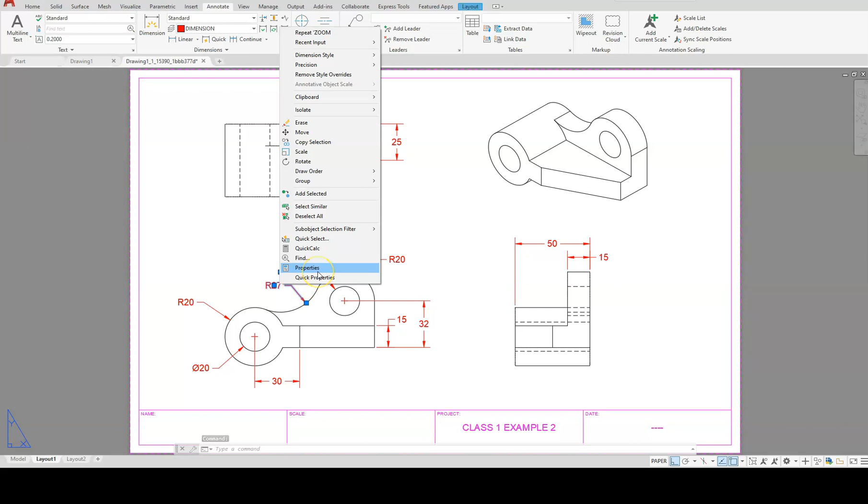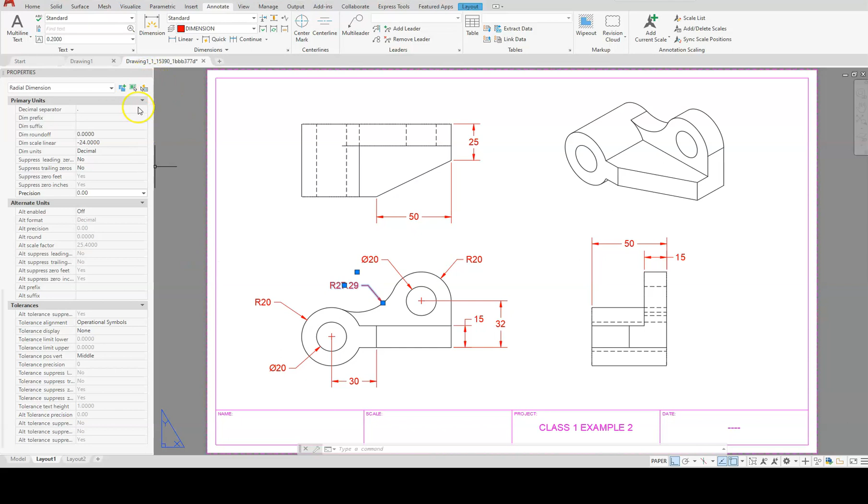One last thing I forgot to show you was that this dimension here has 2 decimal places behind it. So what I want you to do is select that dimension, do a right click, choose where it says properties, scroll all the way down to the bottom in your properties window, find where it says primary units, precision, select the drop down, and choose where it has 0 decimal places. You can close the properties window by selecting that X and then select the escape button.